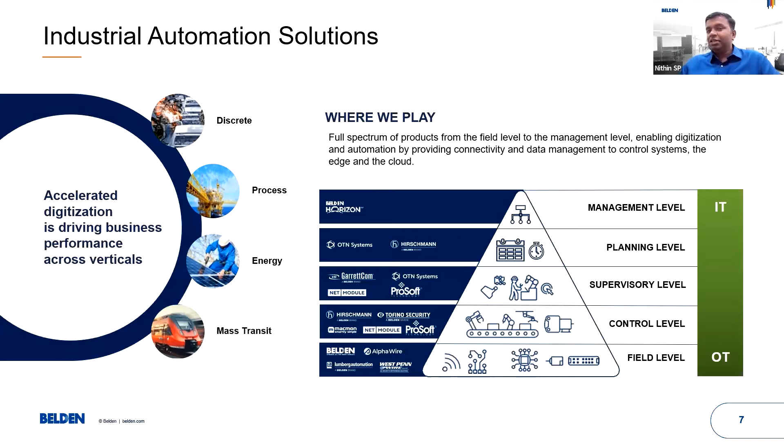Why we're having this call is because, well, Industry 1.0 was focused on getting machines to work instead of humans. Industry 2.0 in the late 19th century was more about getting more machines to do much more work at a faster pace. But then evolution happened in the late 20th century where we said, okay, we have a lot of machines, we're not able to control that, so let's bring in a bit of automation, get some computers and electronics involved.

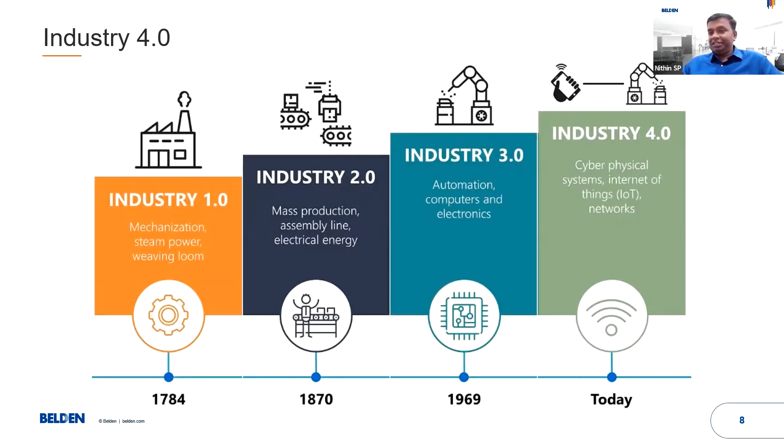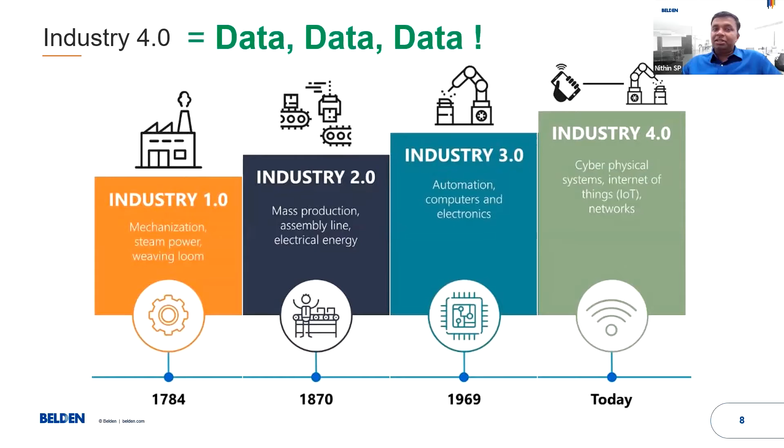But the true innovation and transformation happening today is bringing a lot of digital technologies into the industry operational flow. This is happening because we have a lot of data, IoT is playing a big role, networks are there. All of that is so important and critical, but at the same time we have to do it in a very secure manner.

Why is this recovery and growth happening? It's post-COVID, most industries are investing, and infrastructure projects that were on hold for many years are all opening up. We can see this around us, metros being constructed, new airports coming up. With this, the economic status of citizens in India also increases, and by virtue of that there's demand for real estate. That's again where cement and steel play a major role.

But when these opportunities come your way, what most of our customers are looking at and telling us is they want to increase their production efficiency. How that is possible is to use the data available in the plant. If we don't use data to improve efficiency, it would only be a one-sided effort, just saying we should be doing this, without a very convincing answer.

Another way most customers are achieving sustained business growth and preparing for real growth in revenue is by connecting their existing plants. By doing this, they get better visibility of all the planning, dashboards, and performance metrics across all those plants.

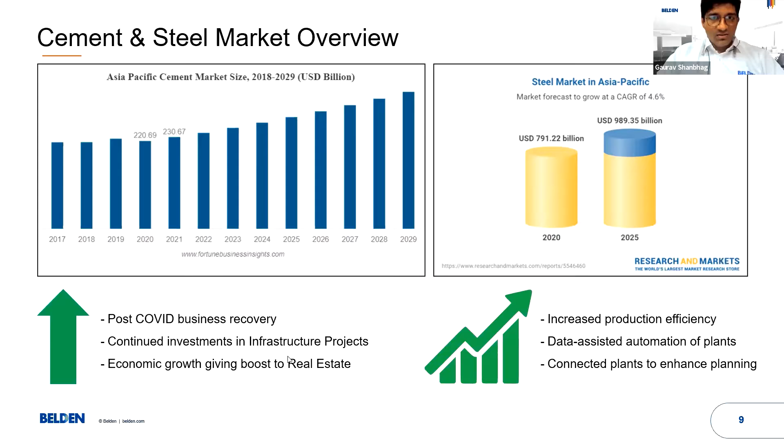So cement and steel, both are into infrastructure building, and if you see the processes, there's a series of processes in terms of automation, in terms of bringing out the best end product. So in cement particularly, you have the dry processes and the wet processes, right from the quarries to the dispatch.

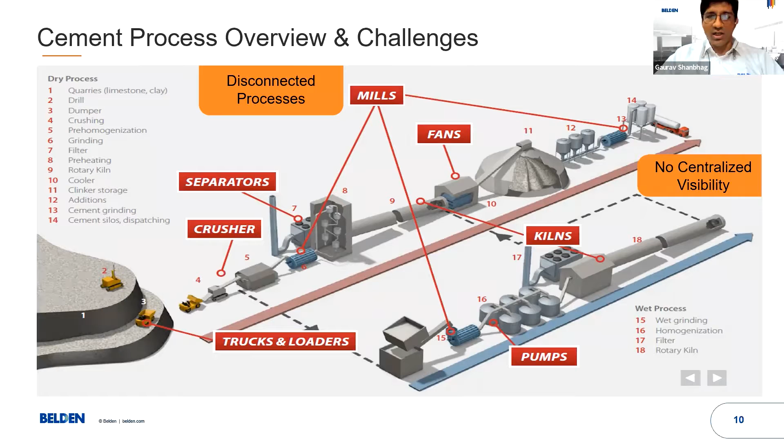So there is a level of automation at each of these processes, but individually, although they are automated, when we see in totality, these are all still disconnected processes, and due to which there is a lot of manual intervention. The data is contained for that particular process, and that's the reason why there is no way to gain centralized visibility and control towards minimizing the losses that are happening.

Similarly, in metal and mining, as well as in the steel industry to be particular, there is a lot of harsh mechanical processes, a series of processes right from the mining, iron ore, coal, limestone, and taking it on through processes like stackers, reclaimers. A lot of harsh processes, and when it comes to steel manufacturing, all these processes like blast furnace, electric furnace, refining.

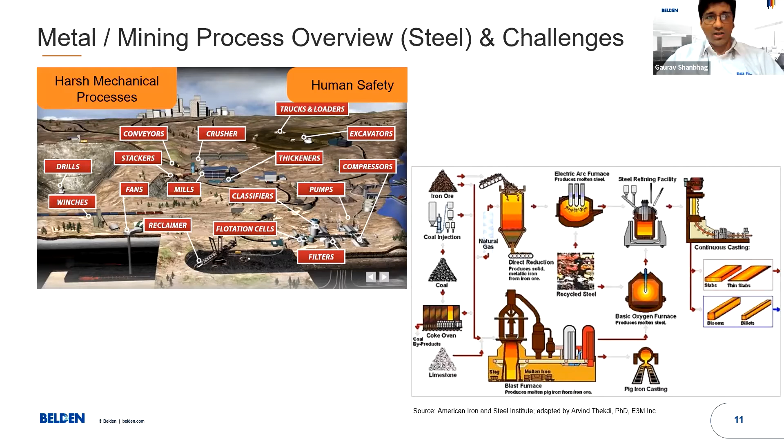It's not that conducive to human safety, but at the same time these processes are very critical, right?

Now when it comes to overcoming the losses in these process plants, it is mainly categorized as 8 major losses. If you see it in a broad spectrum, some of which are avoidable and some of which are unavoidable.

For example, when you have a scheduled shutdown or a production adjustment according to the demand, or scheduled shutdown that happens annually or periodically for maintenance purpose, those are some things that you cannot avoid. But then, those are shutdown losses.

But some things like equipment failures, process failures, where there is a lapse in the maintenance of the equipment, or the process fails, so those are some downtimes which really affect the production and the quality. Then there can be regular production losses and irregular production losses.

Some things which can be due to the restarting of a particular process or switchover. Some things that can be due to the increase or decrease of production rate. That can be happening, and there can always be any defects formed in the end product, as well as some reprocessing that may be needed. So those are all different losses, and the net value operating hour is what is really useful, right?

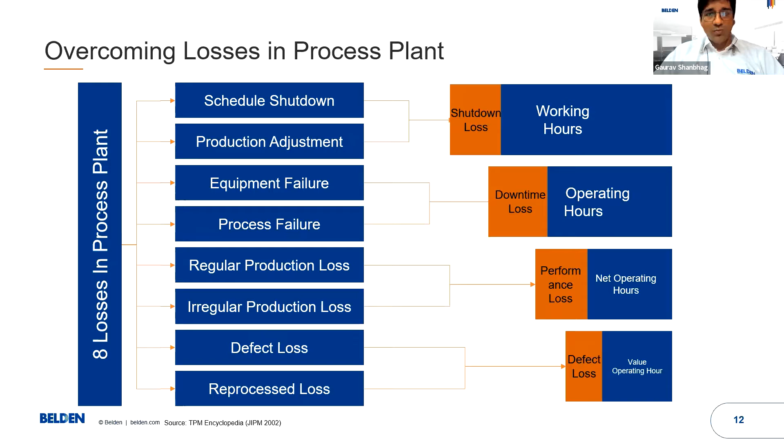So minimizing these losses is very important, and that can be done with data, by implementing technologies. It can be robotics, it can be artificial intelligence, machine learning. There can be just implementing technologies, but that is not enough. It is about doing it with the right technique.

So it can be something where you have a process clean sheeting. It's not something that is an incremental change to an existing process, rather creating a new process, or something from scratch that really optimizes the value of adopting a particular solution.

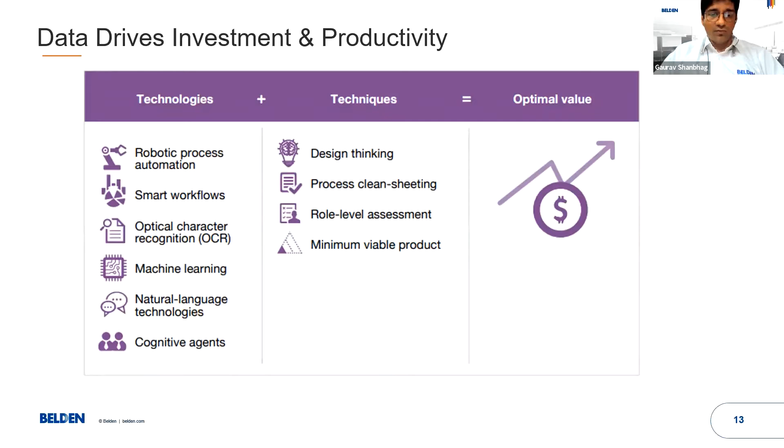When we talk about digitizing, it is about bringing it on a common platform where we are able to build a network connectivity, because it's all data. When it's data, the legacy systems may not have an IP, but those can be brought into a common platform on an IP, and then further on a common platform. And that is what is data acquisition, where we are digitizing the assets.

Further, when you have all the data on a common platform, you are able to decide the flow of data. You are having the data which can be monitored. Now you can see what is the efficiency, what are the assets that are connected.

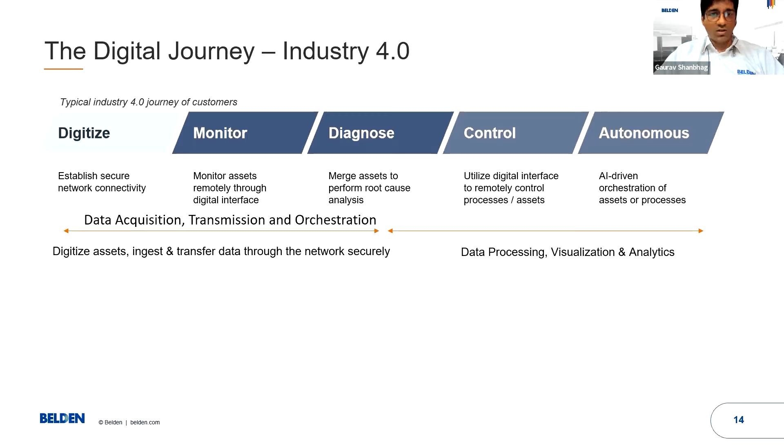And then you can diagnose the root cause at a certain level by pinpointing that, okay, this is a process which is consuming a certain amount, which is not operating as per the defined procedure or the defined process. So that's where you can do the monitoring and diagnosing.

And furthermore, this is the pre-ingestion part. But when you talk about post-ingestion, where you are now able to control the processes by using a digital interface, or by doing remote, manless processes, that's where the real utility of all this digitizing comes into picture.

And when you have all this data, you're able to also use it for processing at the edge, as well as visualize it for analytics, for a larger picture, to reduce the resources, or optimize the resources for all the processes.

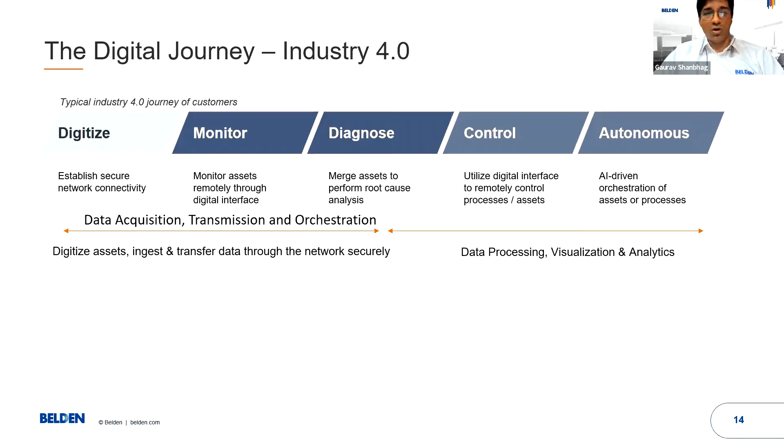So customers basically struggle with digitizing the assets, and that's where Belden is able to be in the right position with the right solutions and products that come into strengthening the networking connectivity backbone. And that's where the data originating from the sensor, from the field to the cloud, is facilitated.

A typical implementation of a digital solution is a step-by-step process. So it starts with establishing the backbone, where you have sensors and PLCs, but most of the time your OEMs are supplying the sensors, PLC, and the setups.

But bridging it, or building it into the OT network, is a concern of most OT customers, because it's all silos — OEMs are providing different setups, but these are still working individually. They are not connected with each other. So building it into an OT network or backbone is what brings all of these processes onto a common platform.

At the same time, when you're connecting devices and assets, securing it such that each process does not affect the other process — any compromise in a single process should not affect the other. That is how you build in security, by creating multiple checkpoints. And when you have established that backbone, that's when you have that infrastructure.

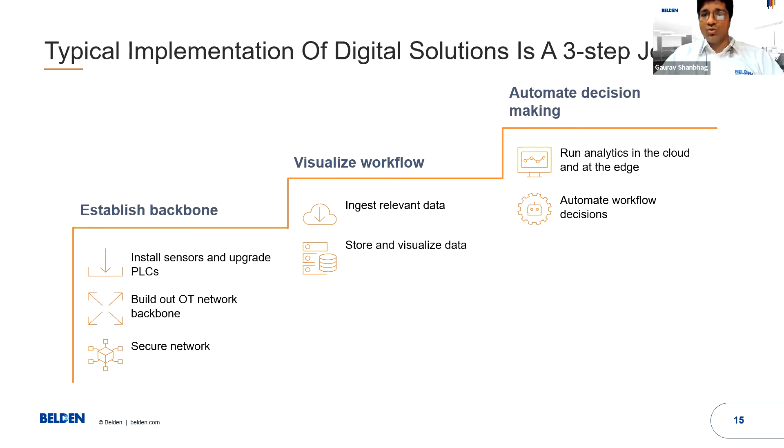So we have the way to visualize the workflows, where we are able to ingest the data, store and visualize it. And then ultimately all of this data can be used for analytics on the edge as well as on the cloud.

Now Belden is in a space where we are able to deliver a strong network backbone, which can bring in the brownfield, greenfield, as well as legacy setups — digitize them, and take it to future expansion, where the analytics is happening on the edge and the cloud.

So determinism is very important for OT assets — building infrastructure that is able to handle time sensitive networks, time sensitive processes. That is where the infrastructure is very important in terms of creating the network backbone, connecting the operations on the OT and the analytics on the manufacturing IT.

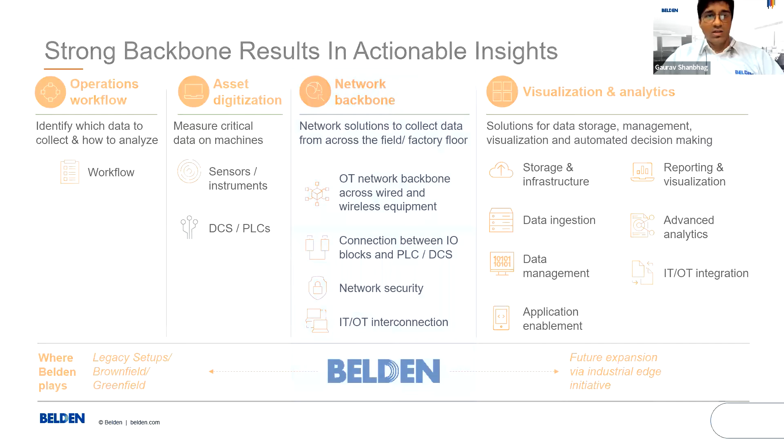It has to comply with standards as per IEC 62443, and doing SCADA enforcement on the OT protocols — which function blocks need read-only and which need read-write privileges, what is the visibility in terms of threat detection, whether the devices are authenticated or not.

So all these different aspects are covered in the pre-ingestion and the analytics part, where you are sending data to the cloud, doing secure remote access of your plant for operational purposes. That is what a complete digital plant covers, in terms of connectivity and cybersecurity.

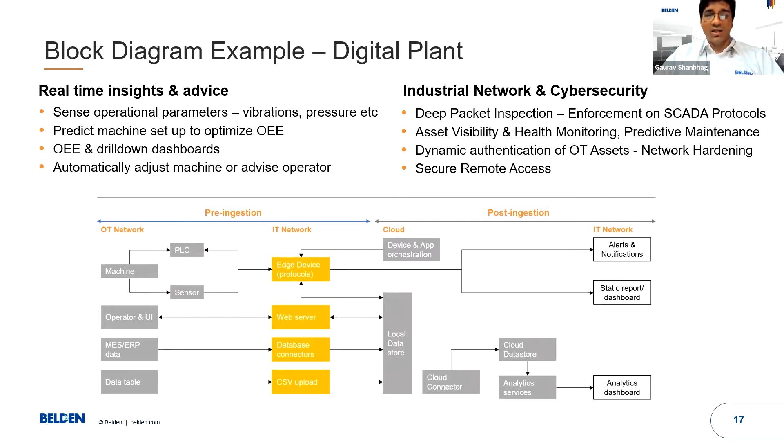So the right approach is for the right results, as organizations are embracing new market trends for future growth and to easily scale to the next level. Connectivity is very important, where you put data to work.

You are digitizing your legacy devices. It's not a replacement, it's a retrofit where you are not completely replacing the existing infrastructure. So the approach needs to be a smooth transition, but at the same time, the existing staff needs to also be ready for this change. It should not be a difficult one.

So this changing of skills needs to be easy to adapt solutions that are implemented. And when all of this is done, when you have an IEC 62443 kind of approach which validates your security-first mindset, that's when you're able to visualize and adapt to the digital change that the organization will gain from.

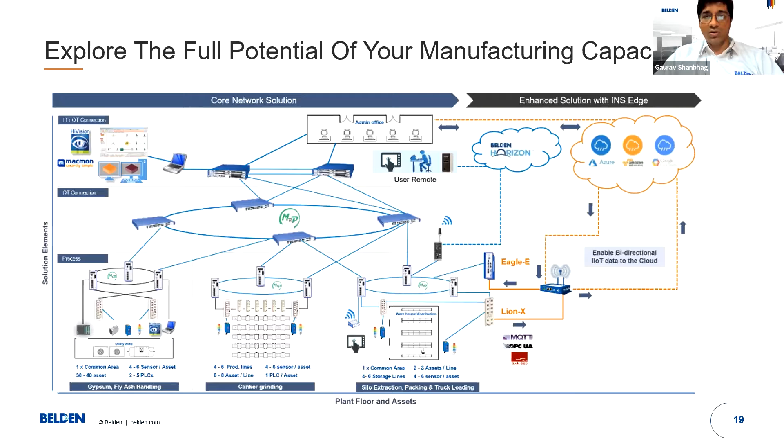So all in all, why Belden? Because we exist to build the foundation of a digital world, because we have a very strong performance-driven portfolio with the right set of people and products, with a future thinking expertise and purpose-built solutions. So we are all game for all the digital transformations that customers are going through.